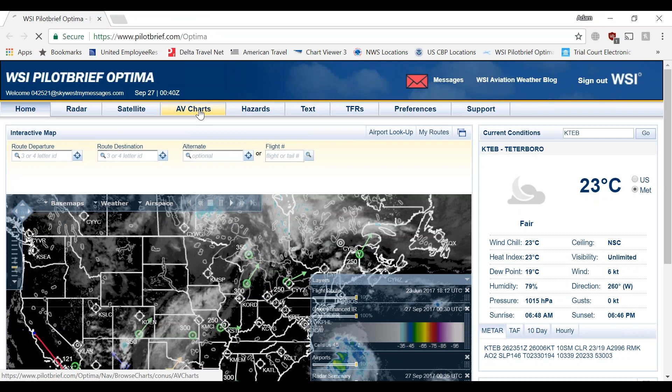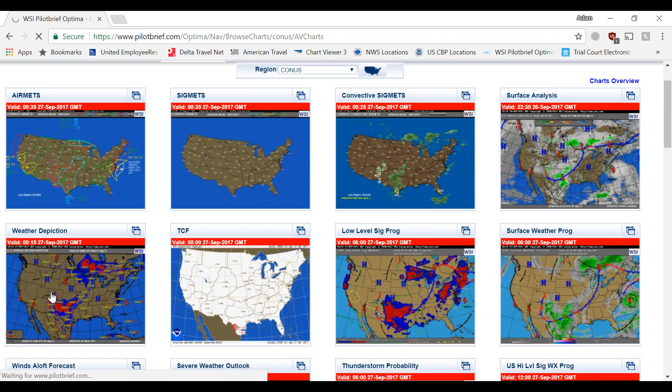As far as this first flight plan goes, you're really not going to want it to have weather, too crazy. Weather we will introduce as we get more into it. But anyway, even if we wanted to, there's really not much going on out there from what I can see. This is what we're looking at. It's going to be pretty hard to find some weather when you look at Denver going to the west. Anyway, that's probably a good thing, so I'm cool with it.

Just throw out whatever you guys want. Seattle to Phoenix? Okay, Phoenix to where? Seattle. Phoenix to Seattle, okay, I can do that. Or whatever's in Montana, I don't know. Maybe do like Boise or something. Don't we fly right to Glacier National Park? Yeah we do, let's do that. That's Kalispell.

Let's see here, Christy finally is in here. Just missed out on the pizza delivery, Christy. Missed out on the what? Well, there's another Christy, I should say. There's a Christy online, and then there's Christy in class. I was gonna say, she's been here the whole time. Didn't miss the pizza delivery. I said Christy - oh no, you just walked in. I just logged in, wait a minute. I was like, Crystal, Crystal. Yeah, Crystal is in just here, threw me for a loop because they have the same last name too. Weird, yes, you mean Crystal Jones? Yeah, oh that's why I was messing it up. That would be confusing. Anyway, that's awesome, that's why I was just looking at Jones and thinking Crystal Jones just logged in, but no, she is still not in. It was you though. Yeah, that makes it even crazier.

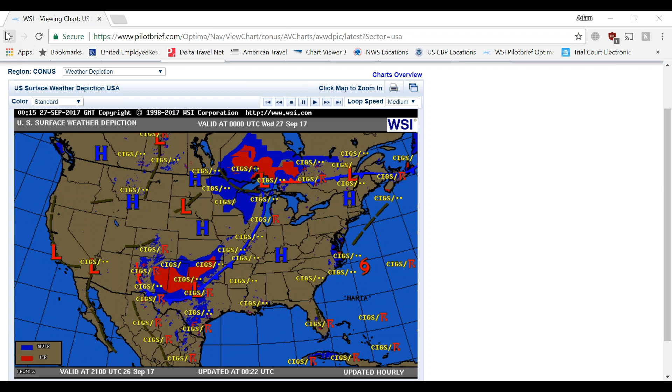Anyway, so okay, that's what we're looking at, not much going on. So let's hop out of this and go into this. And we will go Phoenix and Seattle. Phoenix to Seattle. And then, just in case, we're going to throw Portland in there, and we'll leave Portland as a potential alternate in case we need one for Seattle.

Okay, so let's see what we want here. Don't really want that in there yet. Don't want AIRMETs. Any military, international, or Canadian - don't need SNOWTAMs, don't need surrounding stations. Okay, display, station IDs. Let's get our PDF here.

Okay, so what happens with every single flight plan is you are going to be handed a weather packet. First, you're going to have your flight plan packet, which I'll show you, and we'll start walking through today. But then you're also going to have a weather packet, which is going to have all of your information that you need: all of your origin weather, the METAR, the TAF, the NOTAMs, the pireps, anything for the origin. And then it's going to have your destination information, all the same stuff, METAR, TAFs, NOTAMs, and then anything for the alternate as well, all the weather and NOTAMs for your alternate.

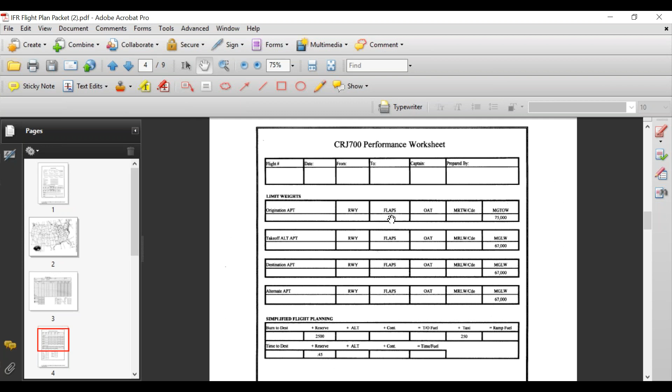This is our performance worksheet where we go through and put in our temperatures and what flap settings and things like that we're going to use for takeoff and landing, for the origin, alternates, and destination. It's all on this page. Also our landing speeds and the runway we use for takeoff, all of that is going to be in here.

The next page is basically our weather minimums, where we list and figure out what our landing minimums are, our alternate weather minimums, where we do all of our calculations for that, and where we list which runways we're going to land on and which approaches we're going to use.

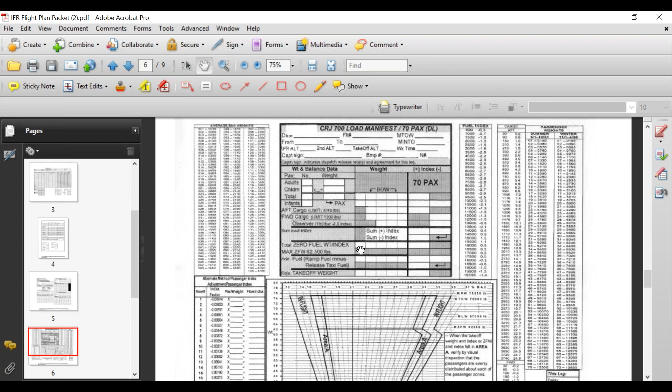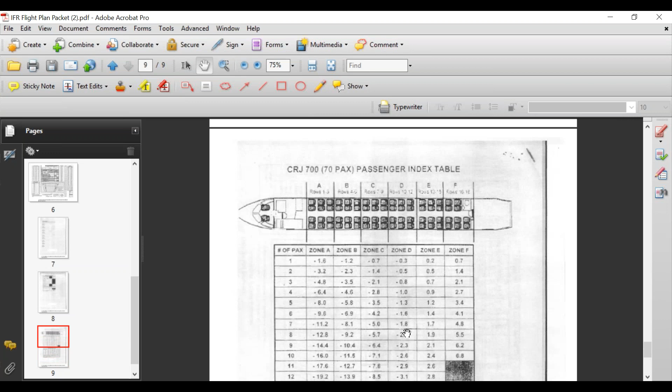If any of this is sounding or looking foreign, it'll make sense. This page you should be familiar with, that's where you're going to do your weight and balance. There's your list of aircraft, then your passenger pin card, and your index table. That's the last page. So some of the stuff you've seen, some of it you haven't.

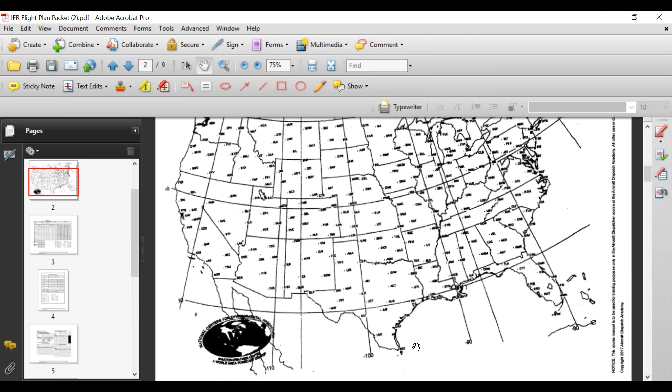You're all supposed to seem pretty overwhelming right now, right? Yes, 100%. How overwhelmed were you the first time we went through the flight planning? Pretty overwhelming. What about now? I feel good now, but it was stressful. But you catch on. Yeah, it's just repetition.

We're going to do 6 or 7 flight plans over the next 2 or 3 weeks here.

Okay, so let's go back to the list of aircraft. We're going to just figure out a few little things. It's always good to have even a piece of scratch paper. When you print these flight plan packets out, depending on how you print them, you can always just write on the back sides of these pages for your notes, or you can use a blank piece of paper for note taking to do your calculations.

When I'm doing it on the computer like this, I'm actually going to be filling this all out in real time, kind of like when we were doing the weight and balance and I filled it out by typing it all in. I'm going to be doing that this time as well.

At the end of the class, you basically need to have 5 fully completed flight plans to turn in. The ones we do in class are fine to use, and the ones I assign for you to do at home are fine as well. Your final flight plan that you do in class is fine to use as one of them too.

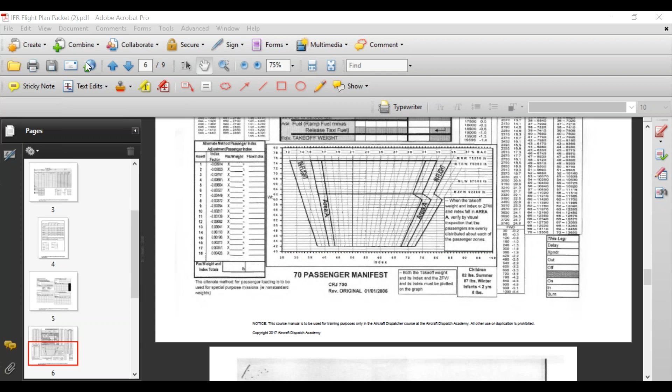What we're going to do is make up some numbers to use and pick one of the aircraft. I'm just going to bring in this little Word document to put our notes in here. Let's use 752 Sierra Kilo, that's going to be the plane we use. So going back into this, I'm going to type in November 752... oops, that's 852... 752 Sierra Kilo.

So when I give you the assignments, you'll just see the tail number, and then the next thing you're going to see is the amount of passengers. Let's just say 63 adults and 3 kids. And then let's just say we have 100 bags.

We'll just leave it at that. The only other thing that I will give you, and sometimes with this stuff, I'll do more than that. Sometimes I'll put 500 pounds of cargo in the forward compartment, or sometimes I'll put a jump seater or whatever. You guys have already seen those when we've done those weight and balance stuff.

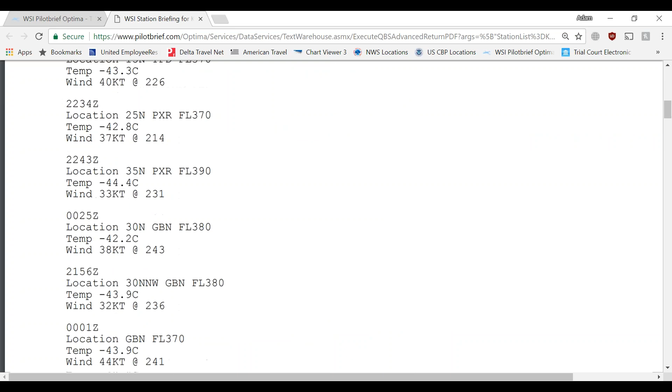We want to start taking a look at our NOTAMs. Anything you see from a NOTAM standpoint, you want to notate. So if I see that one of the runways is closed, I just want to notate that, so when I go to select a runway, I know to disregard it.

Now, the other thing, now that we've already looked at the weather, when we start scrolling through these NOTAMs for Phoenix and Seattle, and we've talked about the ones we train our eyes to stop and look at, like the runways, the navs, different ones like that, we know most of those NOTAMs we only usually care about when the weather is bad. That's when those NOTAMs play a bigger role. When the weather is great like this, when it's VFR weather, those NOTAMs almost have zero significance to us. You could have every single ILS in Seattle and Phoenix out of service, we wouldn't care less, because we're not going to need them for this flight.

We're expecting greater than 6 statute miles, skies clear at arrival, and taking off in Phoenix, same thing, great weather. We don't care, essentially. That's why we look at the weather first, because knowing the weather is going to tell us how much we care about the NOTAMs. So we're still going to look at the NOTAMs, but the only thing we're really going to care about NOTAM-wise at this point is whether a runway is closed or open. So some of those NOTAMs we train our eyes to stop and read aren't going to have as much significance. Let's start looking at Phoenix NOTAMs.

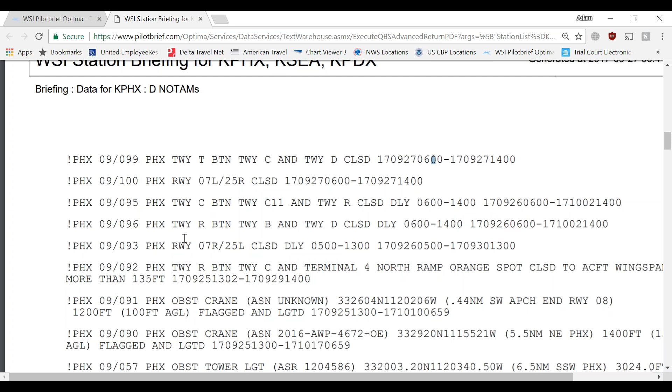So 7 left, 25 right's closed, but it's not in our departure window, so we don't care. Taxiway, don't care. Taxiway, we don't care. 7 right, 25 left, same deal, 500 Zulu, 4 hours after we leave, we don't care about that one. Taxiway, obstacle - scrolling down here, don't care about any of these. Taxiway, apron, taxiway, obstacle.

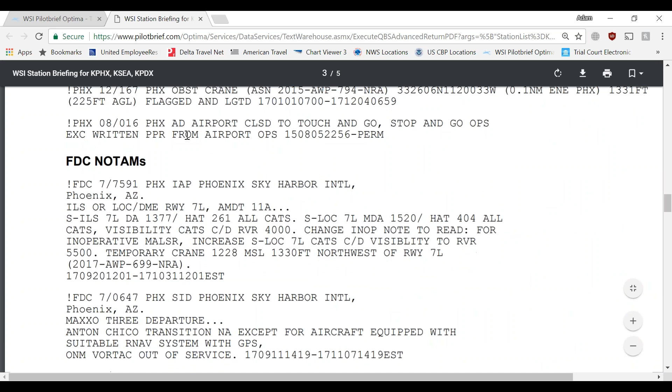And so there's that - remember how we talked about this AD? So Phoenix Aerodrome, airport closed to touch and go, stop and go ops, except with prior permission from airport ops. Does anybody know what touch and go is? John knows. Yeah, you immediately take off. This is mostly talking about student pilots that are practicing landings and takeoffs. We don't have any of our flights that do this.

Our passengers don't necessarily like it. So this is really just applying to those small little prop planes with student pilots. This is a big hub airport, they don't have time to have little dudes in Cessnas practicing - we've got 747s coming up on their ass. All right, so that doesn't mean anything to us.

Okay, now we're into FDC NOTAMs. Just a quick refresher on what is an FDC NOTAM.

Instrument procedures, not necessarily approach. It can be approach, but any instrument procedure, SID, stars, or approaches.

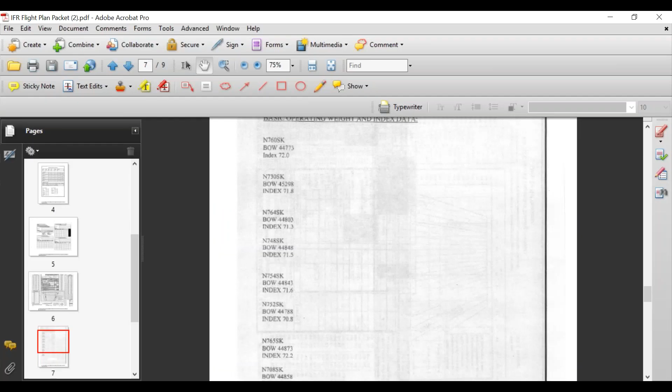So what we want to start doing is slowly start kind of filling out this packet here.

So we will just use today's date. Just go 9/26. And you can put your own name as the dispatcher.

Okay, this is the original release, so we can circle that. It is not an amended release. We always file IFR, so you can circle IFR there.

This is going to be flight number 1. We know our aircraft number. It is November 752 Sierra Kilo, and it is from Phoenix to Seattle.

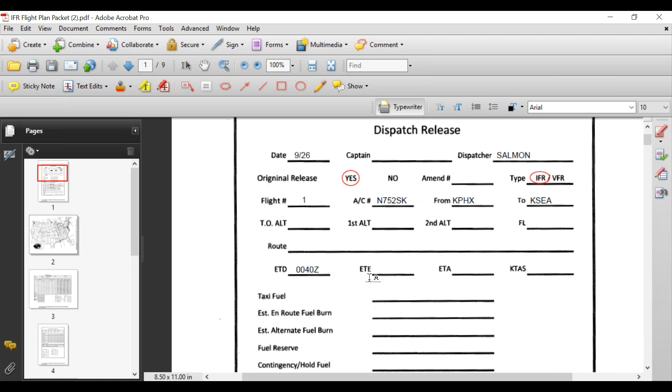And that's all we know so far on the front page. Second page, that's that useless map thing.

We'll come back to this in a minute once we kind of start figuring out our route. But for right now, we can go to this performance page, start typing in Phoenix as the origin. We don't know the runway or anything there yet. We're going to go and pick that here in just a minute.

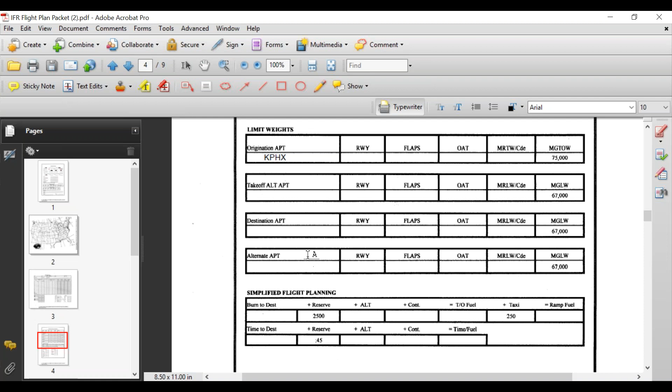And a lot of this other stuff, we'll fill this in momentarily when we start picking our runways. Okay. So this is kind of where we're at right now. This is Phoenix, so you can go ahead and write Phoenix in right here.

This is our scheduled time of departure, 0040 Zulu, and the weather at our scheduled time of departure is, just come back up here and look at your Phoenix METAR. We've got 10 statute miles. So a lot of times this doesn't necessarily give you enough room to write everything in.

But the most important things to write in here are going to be your wind, your visibility for sure. If you have multiple cloud layers here, if you just have one, just write that one. If you have multiple like this, the one you're going to want to go with is the one that represents a ceiling. So in this case, don't worry about few at 12,000 or scattered 20,000. Just write in broken 25,000.

Write your temperature, dew point, and your altimeter. So 10 miles, or wind 30012. I'm just going to write 30012 knots, 10 statute miles, broken 25,000, 31 over -7. Then altimeter was, I think, 2973. Look at that, that's perfect. That's our weather at our scheduled time of departure.

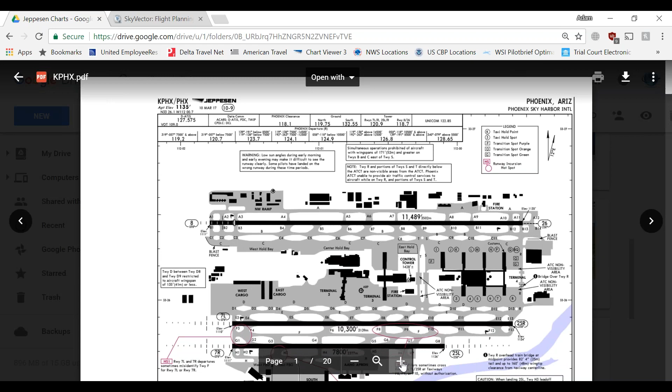Okay, that's our Phoenix Airport layout. So when just by kind of what you think would be common sense, when we're looking for a runway to take off on, what are the primary things we're looking for? Headwind. Yes, headwind. We want to take off into the wind. Okay. Anything else? Runway length. Runway length is always going to be more important for takeoff than it is for landing. We can usually pick the longest runway available for takeoff, and for landing we don't usually need all that much, so it doesn't really matter too much.

We looked at the NOTAMs. We already know that none of these runways are closed. Okay, so this one here on the top is runway 8 and 26. It's 11,489 feet long. Going down here, we've got runway 7 left and 25 right. It is 10,300 feet long, and then runway 7 right, 25 left, 7,800 feet long.

So just based on looking at those, does anyone remember what our wind is? I think it's at 300. 300 at 12 knots. So at least from which side of these do we want to take off on? Runway 26 on the right.

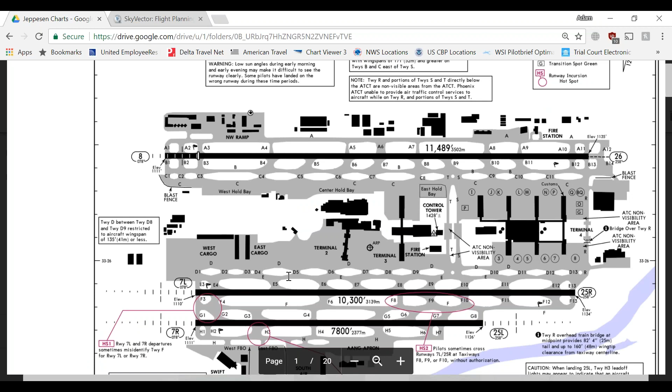Okay, while we've got our Jeppesen charts up there, this next part, while we're picking our runway for takeoff, even though our weather is good, we still need to know what our takeoff minimums are for this runway in Phoenix. So we're going to look that up next.

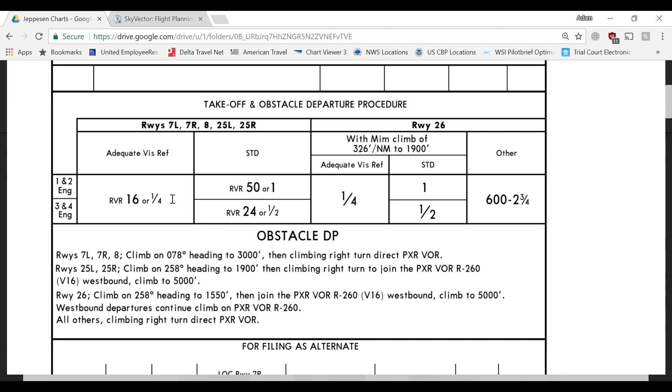Remember, the takeoff minimums are usually on the page following the airport layout. You can see them all right here. So here is runway 7 left, 7 right, 8, 25 left, 25 right, and over here by itself is runway 26.

So runway 26, what are the best possible takeoff minimums for this runway? Quarter mile. Okay, quarter mile is the best we can do.

Now, if we had chosen 25 left and 25 right, this one is the same thing, we can go down to a quarter mile or 1600 RVR. Now, just by looking at these two and comparing them, does anybody notice what the difference is here? This says a quarter and this says a quarter, but what's the main difference, that this one has RVR and 26 does not?

Okay, so quarter mile. So we're going back to this, and as we scroll over here, we're going to first put in our standard takeoff minimums. If we go back and look at that real quick, these are our standard takeoff minimums. Now remember, we're using the 1 and 2 engine category here, so 1 mile is our standard takeoff minimums. So right here, we're just going to write in 1 statute mile.

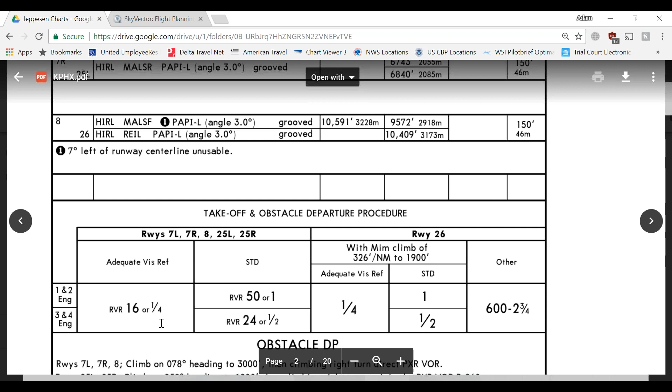Now remember, that's just on runway 26, but even if you look at the other runways, even those ones don't have it. So it's not just a matter of this runway not having it while others do. No runway in Phoenix has that. So if we were in a situation where we were taking off in really low visibility in Phoenix and needed those really low takeoff minimums, we would want to make sure we selected a runway that could go down to those minimums, in that case, in the future when you're looking for that.

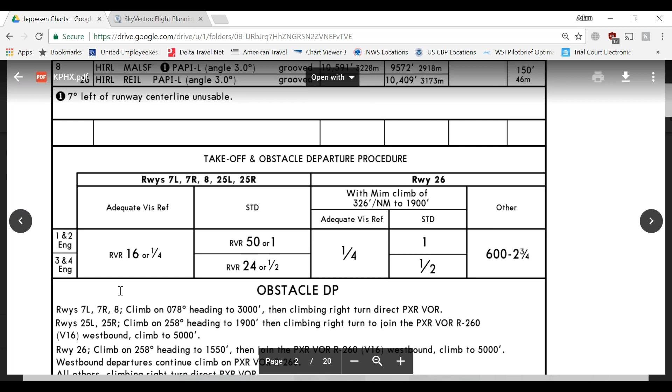This next part is all the filing for alternate. We know that we don't need the alternate stuff, so as far as Phoenix is concerned, we're good. This next number 2 down here is if we need a departure or takeoff alternate. We don't need one, we don't have one, so you're not going to fill in anything down here.

Number 3 is for our destination, and we'll put in all that information up here. Number 4 is for the destination alternate, but we also know we don't have a destination alternate either, so we're not going to fill that in. So really you're just going to fill in number 1 and number 3. We know Phoenix now, we know the weather, we know which runway we're going to use, and we know there's no NOTAMs affecting us.

Now let's take a look at Seattle. We'll just go ahead and type in the information. There's Seattle. If we go back into our weather packet here, let's scroll down into Seattle. We already looked at it once. We know that the TAF is looking good, and we know we're going to be somewhere in this area here, so we know that the weather's going to be good. The only thing we haven't looked at in Seattle is the NOTAMs.

Let's start taking a look at them. So the first one is an airspace NOTAM. It's basically saying that UAS, those drone things, are not allowed in that airspace around the airport, which is a good idea.

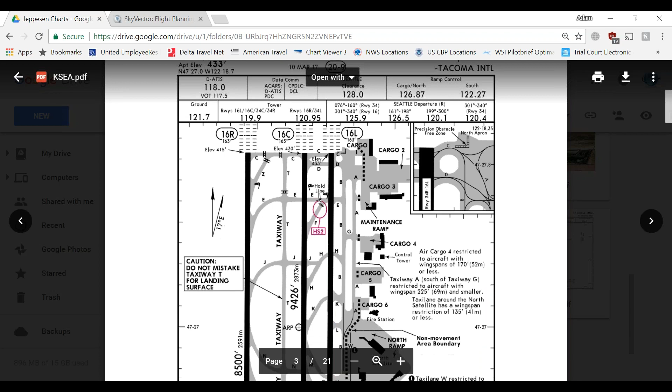So what way was the wind blowing? It's blowing to the south. Yeah, so it's coming out of the northeast, coming out of this direction. So that means which end of these runways will we want to be landing on? South. Yeah, so we'll want to land heading north, right?

So we'll want to land on the 3,4s, one of them. As far as which one, it doesn't really matter which one you pick, other than knowing what the airport itself likes to do. Just knowing the basics: planes taking off generally use the longer runways. So in Seattle, they don't necessarily want you landing on 3,4 right because that's where everyone's waiting to take off. So 3,4 center or 3,4 left is probably what we'd want to plan to land on. But for our sake, we'll just say we're going to use 3,4 left.

So we'll jump back in here. We're going to come on down to here. This first thing that it's asking for is the runway, so we just type in 3,4 left.

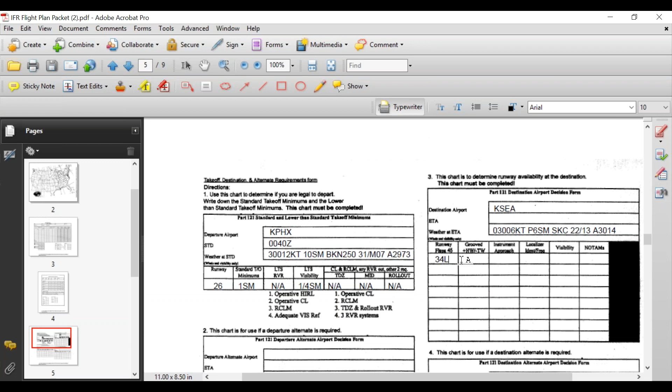So when we come over to here, you can put that it's grooved. I usually just say that if it's not grooved, you just want to put not grooved. If it is grooved, you don't need to mark it - that just means that it is grooved. So the only time you mark it is if it's not grooved, okay?

The only time you really ever see not grooved runways is in Canada, because they don't groove their runways. Did they do a different approach, whether it's grooved or not grooved? Not really, no. It just means in Canada you have to pay more attention to standing water on runways, ice, and contamination - stuff you learn about more in advanced dispatch, once you get hired with an airline. But we don't even do any Canadian cities in this class anyway. There are some in the United States that don't have grooved runways as well - some smaller cities.

But it's not normal. So it's asking if it's grooved and if it's a headwind or a tailwind. We already know that it's a headwind.

The only time that we would be landing with a tailwind intentionally is if you have an airport where you can only land going one direction. Some airports only allow you to land going one direction, so there are situations where you're forced to land with a tailwind because it's all you can do.

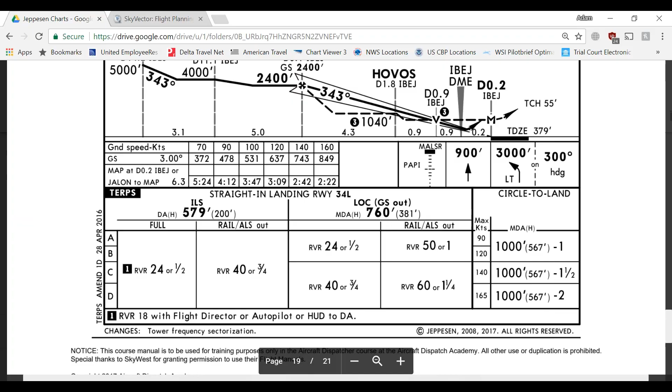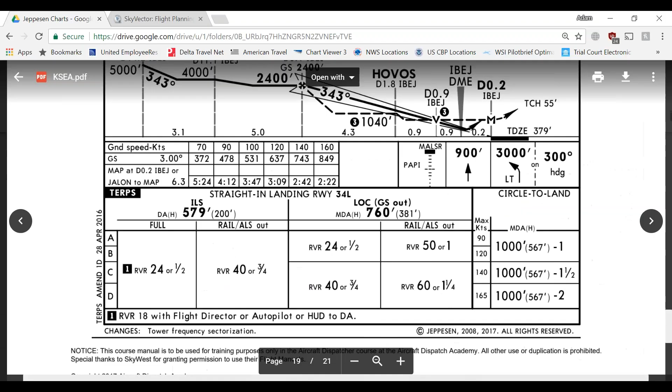Okay, so let's go back to this. We're going to type in that it's an ILS approach. This next part is asking us for the localizer or identifier frequency. Where you find that is on this same chart—if you go up to the very top, this right here is your frequency. I don't really care if you put this in here or not, but if you do, that's where it's at: 110.75.

The visibility needed is half statute mile, and there weren't any NOTAMs affecting that, so just write in not applicable. If there were, you'd put yes, but when there's a NOTAM we normally don't even plan that approach, so if there was, you probably wouldn't be listing it in the first place. It's very rare to see anything but not applicable there, unless it's a one-runway place.

Like if it's St. George and they've got a NOTAM for the glide path being out on the LDA, then we'd be planning that same approach, except our minimums would be higher, and we wouldn't be putting half right there—we'd put whatever it is, and then put yes in the NOTAMs. Normally you'd go back to the front page of your dispatch release, down at the bottom there's a remarks section, and you'd talk about it there, saying there's a NOTAM for the runway, whether minimums are increased, whatever.

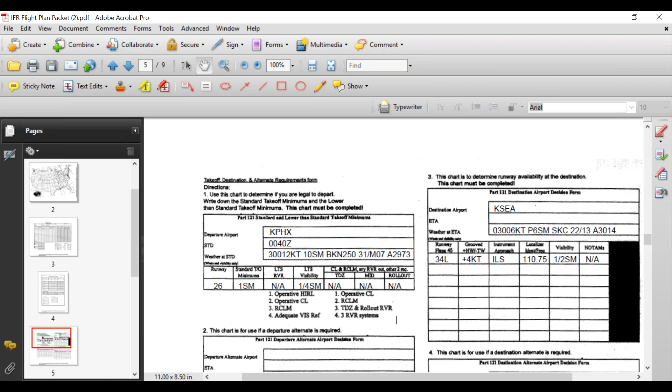Okay, so we're at this point now where we've got runways figured out, we've got weather figured out, we know everything's good to go, we know the MELs, or lack thereof, are good. What we need to do now that we've selected runways and got most of our stuff figured out is build a flight plan that we're actually going to fly. We need to figure out the fuel - I'm going to show you a quick method on how to estimate fuel - and then we need to run through weight and balance, which you mostly already know how to do.

So let's go, and we know we don't have any limitations from a NOTAM standpoint other than the Silo 4 SID in Phoenix, which we can't use. So let's go take a look at SkyVector here for just a second.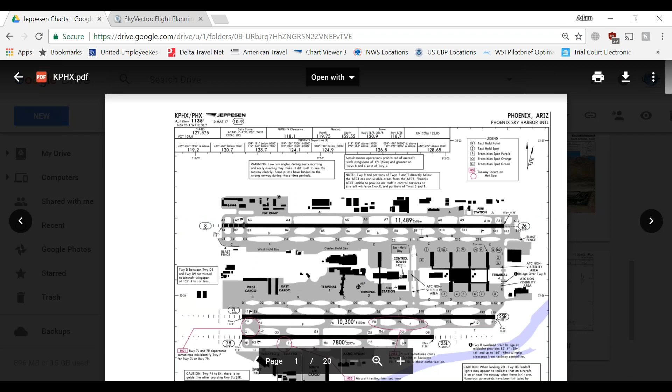So obviously we want to go to the northwest, so the first thing we want to find is a SID that goes to the northwest. This is Seattle - let's go back into Phoenix. So the first ones are stars, so let's scroll down to where our SIDs are.

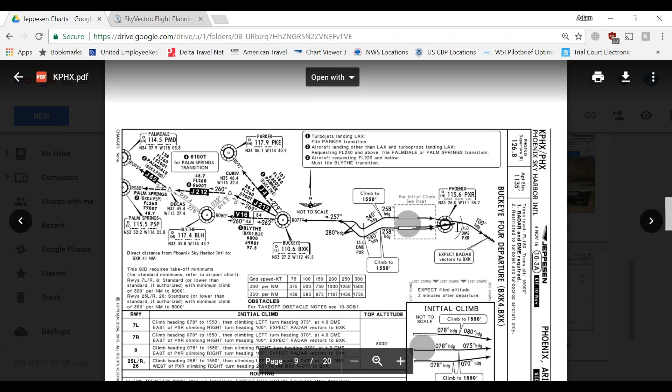Okay, so here's the first SID that we have. This one goes out to the west. It does have some transitions that kind of go northwest, but this is obviously an option. This is the Buckeye 4 departure, so just remember that one for a minute. Let's keep going and see if there's anything better.

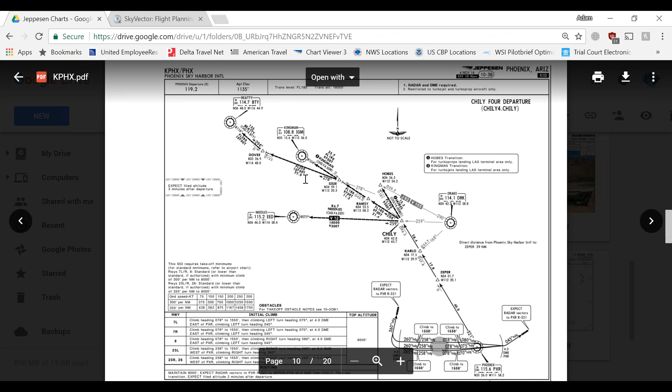We've got the Chily 4 departure, which looks like it goes more northwest. Obviously it goes to Beatty - if you remember the Beatty VORs, the one northwest of Vegas. So that looks like probably the one we'd want, unless we see something better.

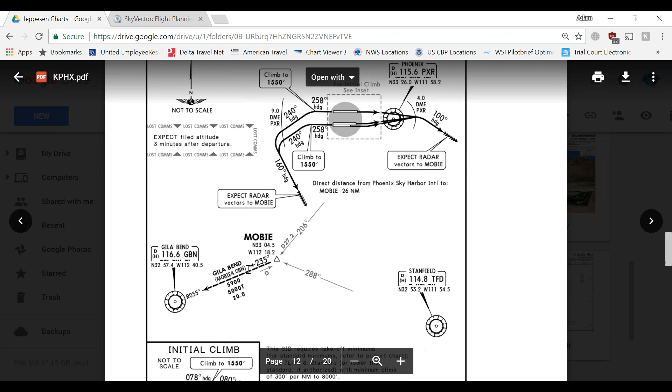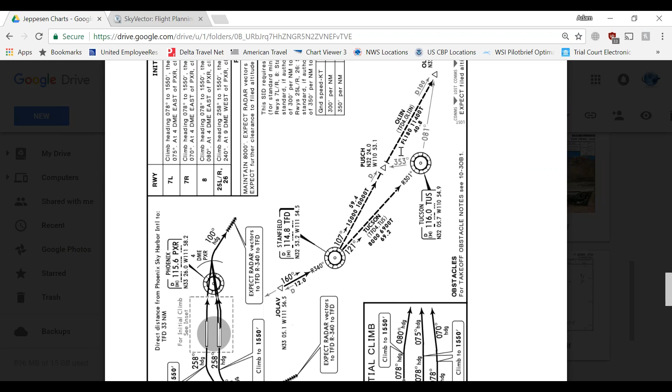There's the Maxo 3, which goes to the east, so let's not worry about that one. There's the Mobie 4, which kind of goes more to the south. Here's the Silo 4, the one we know we can't use, so skip that. And then here's the St. John's 8, which if we flip that around goes to the east. And this is the Stanfield 4, which is also more southeast. That's it - so it looks like the Chily 4 is probably the best.

So let's go take a closer look at the Chily 4, just to see how it works. Now when we're looking at our airport down at the bottom, one thing to note is if you see lines that come off both sides of the runways like this, that's telling us we can use either side - like taking off on runway 8 or runway 26, whatever direction. If you see it only has lines going off of one side, that means you can only use it for taking off that direction. So if it only had lines coming off this east side, that means we can only use it for takeoff on 7 left, right, or runway 8.

So that tells us we can use either runway. It also usually lists the runways here that you can use. This one is fine for runway 8 or runway 26, which we want to use because we're taking off to the west, coming out this way. You can kind of see it has some instructions here to climb - we're just briefly looking over it to see what it says, but it gives you instructions to meet up with, basically, coming up to this Chily intersection. So this is one of those SIDs that is a normal SID.

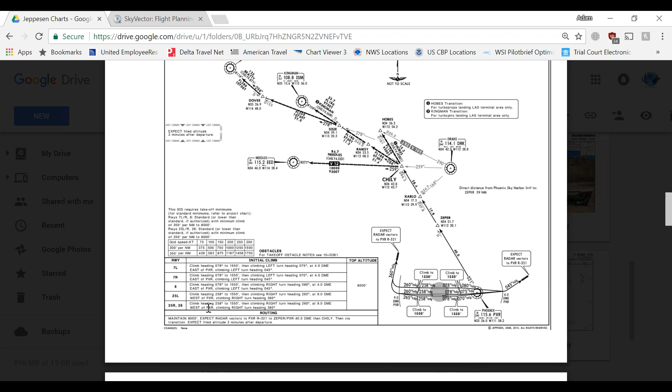If it gets confusing, you can also look at which runway you're using right here. So for 25 right and 26, it actually tells you the instructions: climb heading 258, basically the runway heading, to 1,550 feet.

Then climbing right turn heading 260, once you get to 9 nautical miles DME west of the PXR VOR, which is right here. So as you're flying away from this, when it says you're 9 nautical miles away, that's when you do a climbing right turn to heading 360.

Then from right here it tells you the routing, applicable to all of these runways. It says maintain 8,000 feet, expect radar vectors to the PXR radial 321, which is this radial. That's basically saying you'll fly a direct line until you intercept this radial.

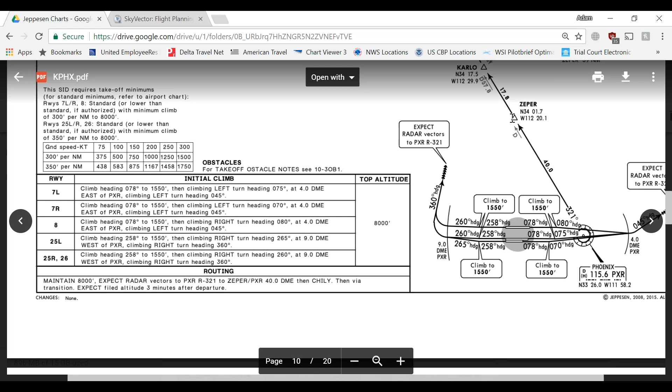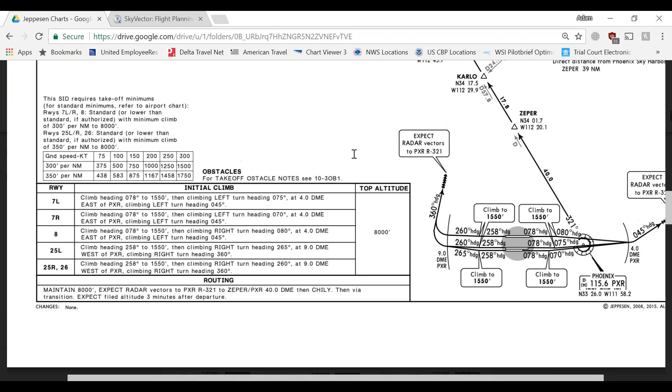Then from there you'll turn and go to Chily intersection. So vectors to the PXR radial 321, to the Zeper, so it's basically saying to this intersection, which is 40 DME from PXR, and then to Chily. So we'll file from here direct to Zeper and then the rest of the SID as it looks there. That's the one we'll plan on using.

I'll show you how we're actually going to write that out on the flight plan in a minute, because SkyVector is not going to accept it like that. It's going to make us type it in manually because it probably won't read this SID, but we'll try and see if it does.

But most likely we're going to take this all the way to this Beatty intersection. Let's jump in here and figure it out, and start looking at where it's going.

So now that Beatty VOR is over here. If we look at it in comparison to our direct line, it's clear over here. I'm pretty sure that if we had that Silo 4 SID available to us, that's probably the better one we would have used in this case.

Because the Silo 4 comes straight and has some stuff that comes off to the north, but it basically routes you up into these airways, which is going to be closer to the direct route. Instead, because it's not available, we're going to have to route over to here through these airways off that Chily intersection or Chily departure. Not a big deal, but that's just the restriction we're given because we can't use the Silo 4.

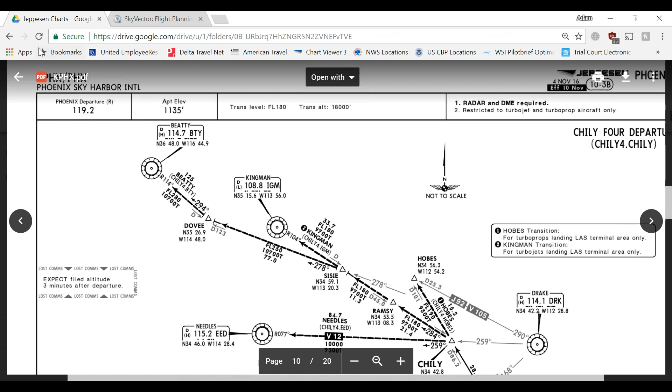Just real quick while we're on this, remember CHILY 4, CHILY 4. Sometimes that's just something you'd want to write in your notes so you don't have to keep going back into the charts to see what it is.

So for Seattle, we want one that comes up from the south.

Okay, so the Frata comes off of the west. The Glacier comes off of the west. This Jawbone comes from the north. There's that Olympia, there's that Battleground. I'm pretty sure that's what we're going to end up using, the Battleground Olympia 2. There's that CHILY, which has Pendleton, Kimberly. And then that one, the Elma, that's a departure.

So yeah, it looks like that Olympia 2. The only thing I'm not sure of is, because remember these charts are from a few months ago, we have to check making sure that's still what it's actually called. It might be the Olympia 3. It's still Olympia 2, so we're good there. And then Phoenix, that CHILY, still CHILY 4. So should be good.

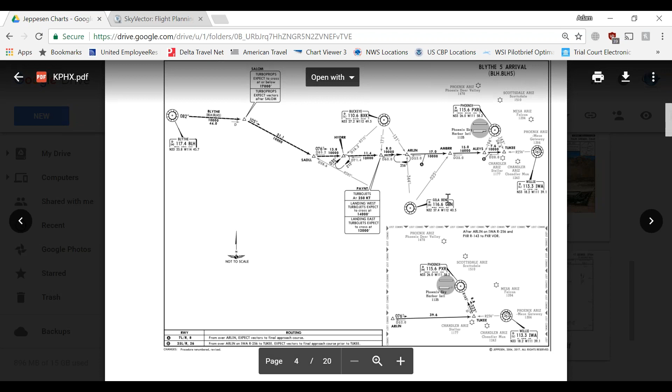So now it has to do it. The only other problem is that if you go back, when you take out the actual CHILY 4 departure, it probably is removing the rest of the stuff too. So the Olympia side is fine, that's following it as it's supposed to. But if you pull this CHILY departure back up, more than likely there's a whole bunch of stuff between CHILY and Beatty that it's not figuring in now. Yeah, because it goes CHILY.

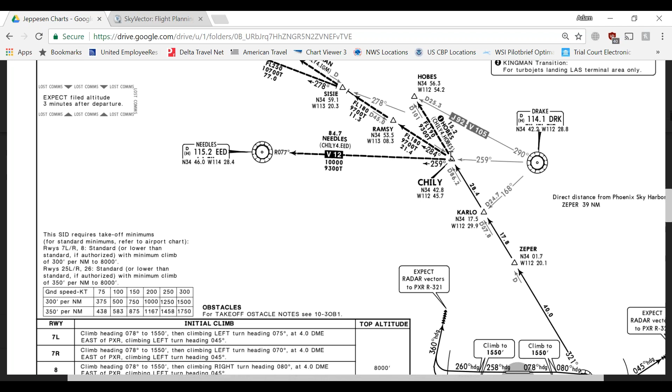So when this happens like this, you end up having to type in all of this stuff individually, which is where the SIDs and STARs help us a lot, not having to do all this crap. So what we're going to have to do is go Phoenix direct to Zeper, and then type in all of these: KARLO, CHILY, RAMSY, SISIE, DOVEE, Beatty. So if anybody can remember those.

Okay, what was the ZEPER? KARLO? Then what, and then CHILY, right? Then CHILY, and then - remember, there's just a name, but no. Actually, the other thing we can do, well, if it has these on here, which it probably doesn't, we just have to go back and look. So, CHILY, RAMSY, and then SISIE. W. Then what? W, D-O-V-E-E, I think that was the last one. Okay.

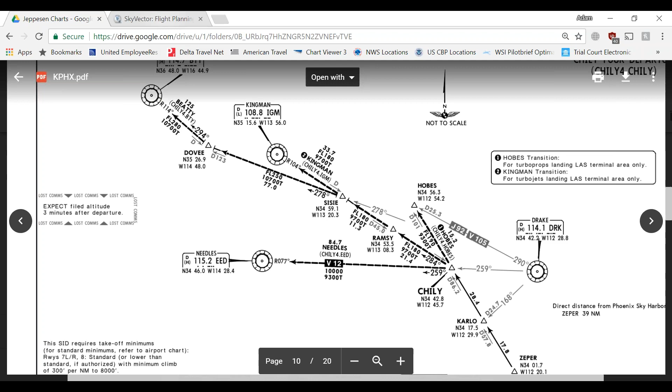So do you have to do this much? Well, you have to bring up your SID first, and then you got to add all of these on there. Once that gets you to the other chart, then you'd have to start at Beatty on the regular chart. So you come to the regular chart, you go to Beatty, right here.

You don't need to bring a magnifying glass, but if you need reading glasses, then you need reading glasses. It's not too bad. I mean, I can show you.

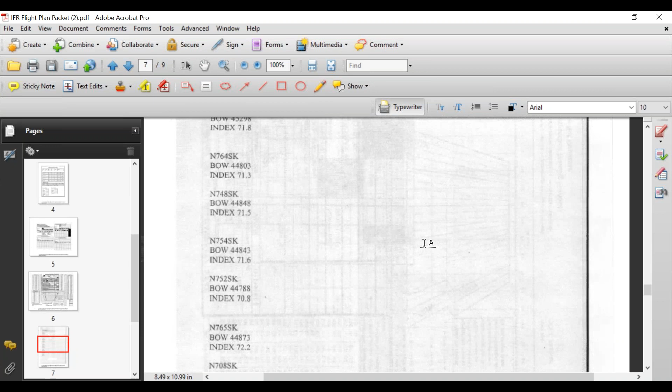Twelve to 16. Okay, so this plane, 752, 44788 on the bow and 70.8 on the index.

Okay, so now we just need to figure out where our passengers are going to be seated. So there's 66 of them. Just fill it up front to back, kind of normal. 12, that's going to be an index of negative 19.2. 12 again, negative 13.9. C is negative 8.5. D is negative 3.1. This is 2.8, I believe. And then what, this is what, 8? No, 6, right? Yeah, 6. 6 is 4.1.

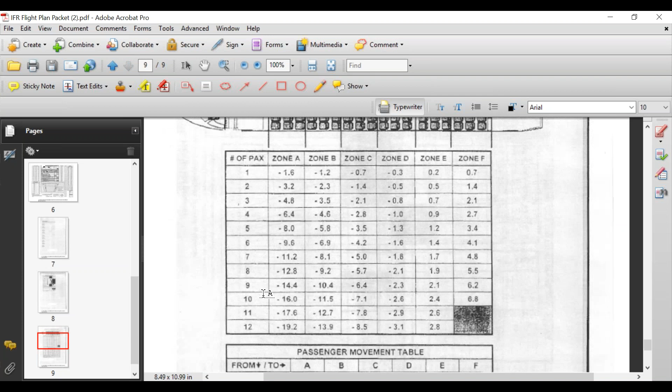Okay, totals are 66. Everybody got that handy? Mathematicians out there? I've got a calculator. Great, that is a start. Negative 44.7, right? And then 2.8 plus 4.1, 6.9. And then those minus each other, negative 37.8. Okay, negative 37.8. So back to here.

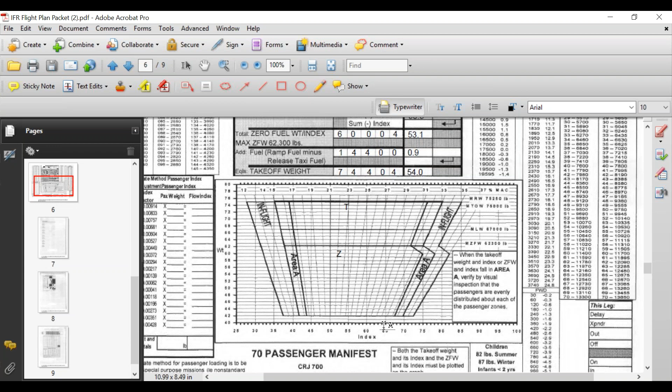Does everyone agree with that? Okay. 62,504. And if we're landing with 2,500 pounds on board, that's just going to be a negative 1.5.

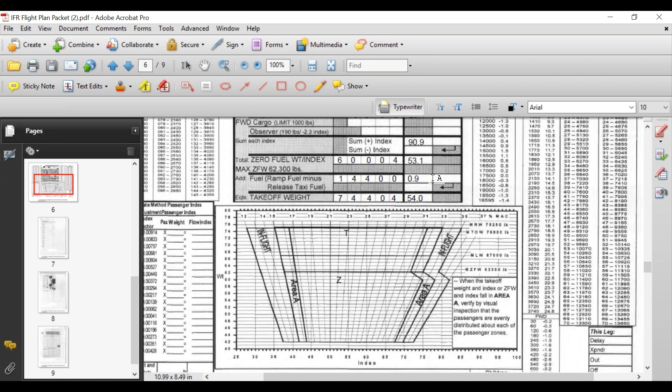So 53.1 minus 1.5. So that takes us down to what, 51.6? So the landing index should be 51.6.

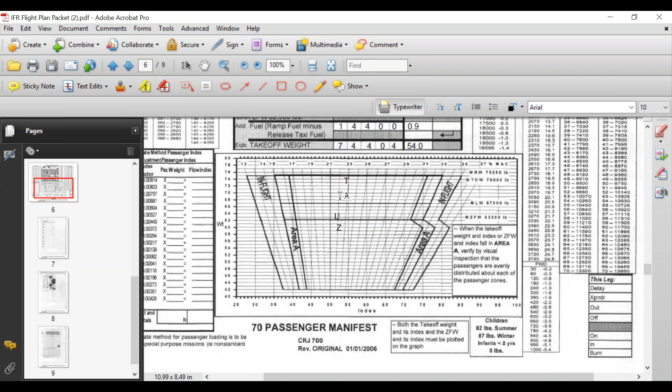So if we graph 62,504 and 51.6, so 51.6 is here, and 62,504 right in there-ish. So anyway, good, we're in balance. Everything looks good. Don't exceed max takeoff weight, don't exceed max landing weight, we don't exceed max zero fuel weight. So initially speaking, our weight and balance looks pretty good.

Okay, so from this point forward, the next thing we jump into is going to be our simplified fuel calculations.